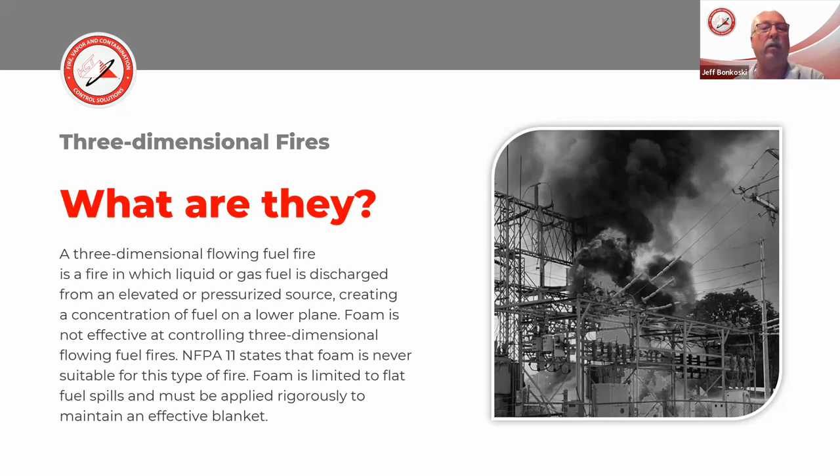If we look at the NFPA foam standard, which we used to use, it's been the only other thing other than water that the fire service, or even industry, has known. If we go into the NFPA standard, into Annex A11 of the appendix, we'll see that it states foam is not suitable for three-dimensional flowing fuel fires or gas fires. But what other options have we had up until now that we've been aware of?

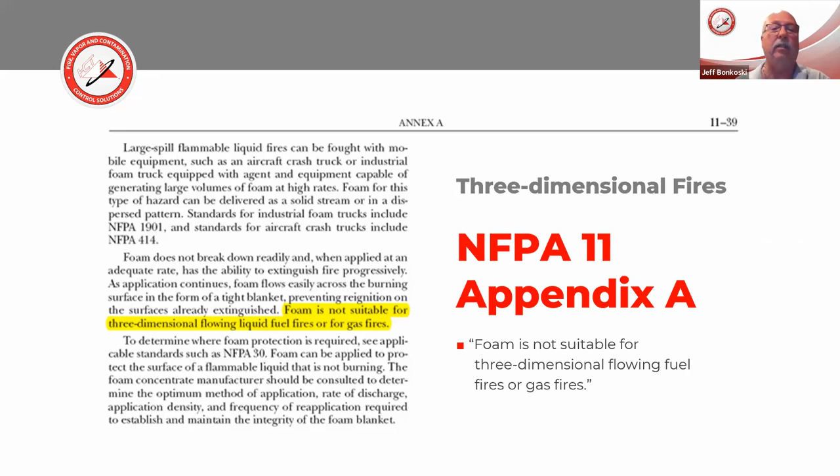Again, with the push for non-fluorinated products, here we are. I always point out to people, when we look at some of these tests on foam products and foams, we're testing them in ideal conditions indoors for use in outdoor and not-so-ideal conditions. So let's look at how this new technology, the F500 encapsulator agent, is able to have a great effect on these three-dimensional hazards.

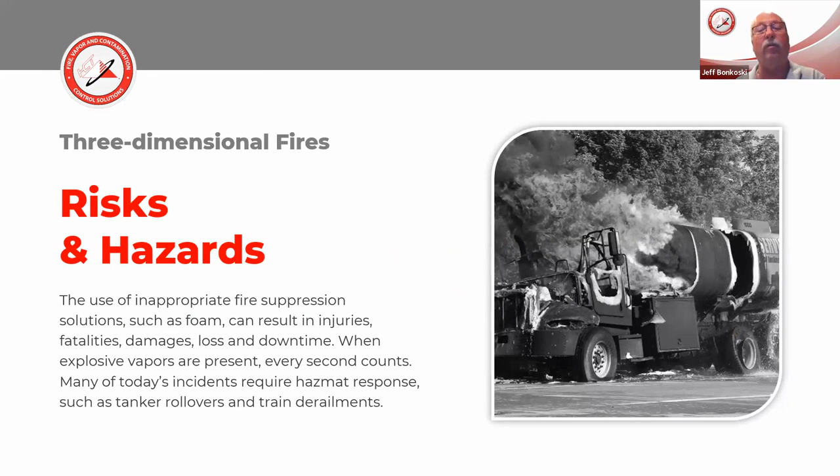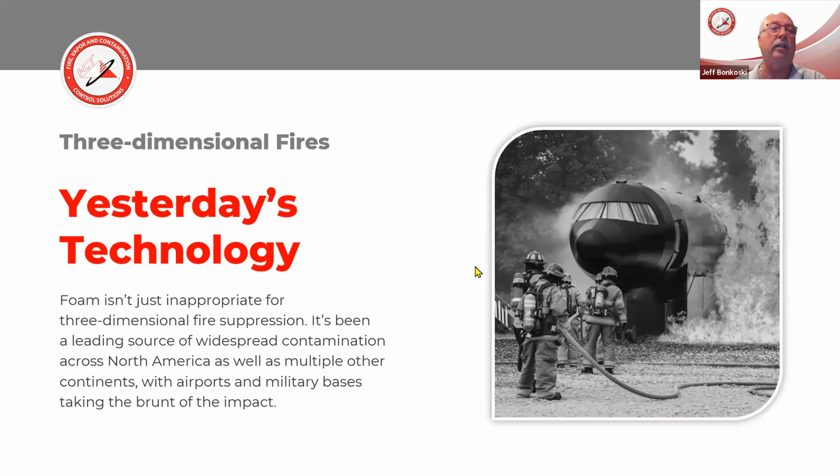And how, in the past, when we've used foam, it's been ineffective, and why. Let's look at yesterday's technology when we test it, and the problems it's causing with those forever chemicals around the world - especially with military bases, airports, and other training facilities where we have been teaching and working to utilize techniques for foam applications in fighting fires.

We look at a normal everyday car fire, we look at Class D metals, we look at some of the issues. Again, with these types of things, foam needs to be able to create a blanket in order to smother the fire.

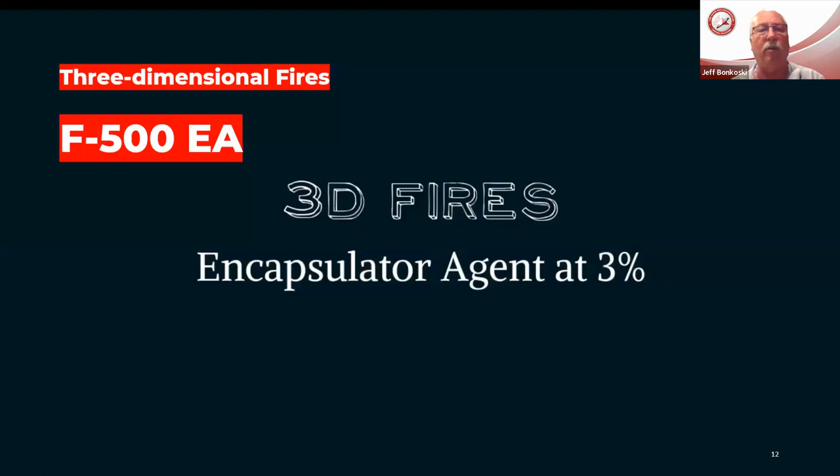We look now at the F500 encapsulator agent, and we have a real quick video showing some of the effects and abilities of the product for those three-dimensional fires. You see it's one hand line, 95 to 125 gallons per minute. Here we have like a well blow-off type system. One hand line, 125 gallons per minute. We're not using three or four hand lines plus powders. It's one hand line with the encapsulator agent being able to do the cooling and the extinguishing.

A mock-up of a jet engine cowling, again showing that three-dimensional, difficult fire that foam, and even powders, can sometimes be difficult to handle without the proper training. Here, in just a matter of seconds, with the encapsulator agent in the water stream, he's doing multiple things. He's encapsulating those vapors, he's cooling that steel. That steel is a source of reignition.

And here we have, again, like a valve or manifold, where maybe there's a bad seal or a bad valve and it catches on fire. Without the proper techniques with powders and foams, without enough of the product on hand, you're going to lose tank farms, you're going to lose facilities. Whereas with the encapsulator agents, again using a single hand line, it's very, very effective at being able to cool, control, and extinguish these fires rather quickly.

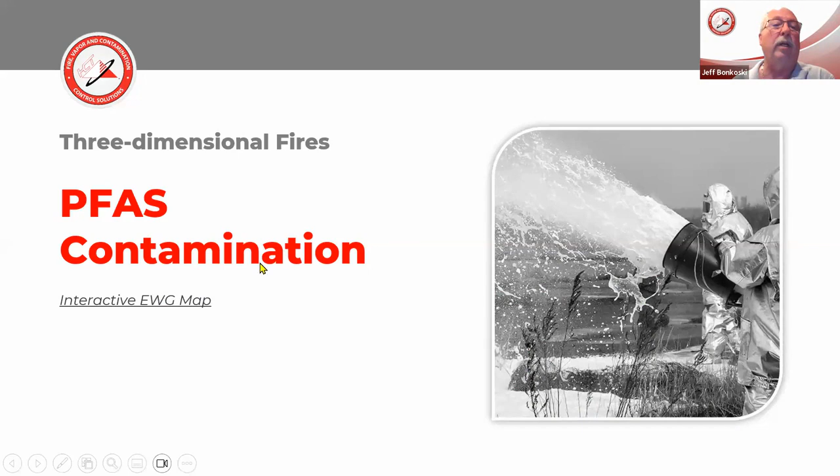So as we go on and look at more, let's look at a recent train incident that took place. Again, a three-dimensional fire. It's showing approximately 75,000 gallons of hazardous wastewater that now has to be treated after that train derailment in East Palestine, Ohio.

Again, the amount of water that's being used - as I continue on, we'll see how water is a very poor agent or method to cool.

When we look at the amount of heat that water could reduce, from testing done in some tunnel firefighting where they were trying to measure the reduction in heat with water, it was like 6 million kilocalories of heat being reduced when using water to try to extinguish these tunnel fires.

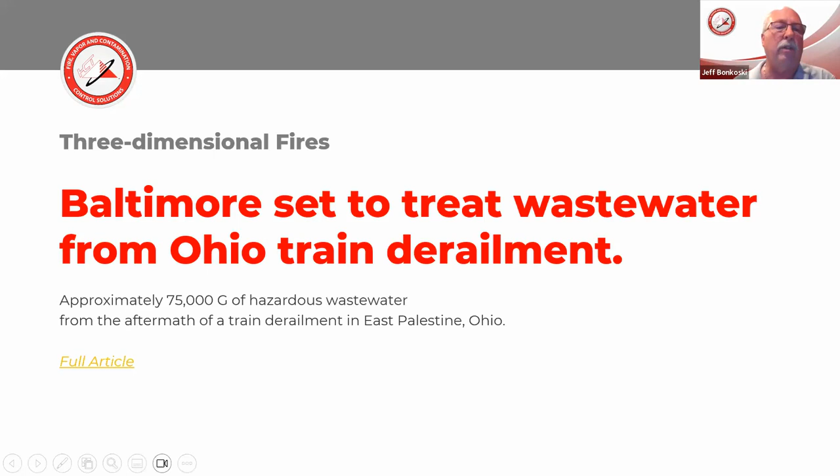And when they started adding F500 into the water solution, it was like 21 million - a huge increase in the amount of heat able to be absorbed. That even gets into when we start looking at trying to cool metal surfaces and all the other reignition sources we have to deal with.

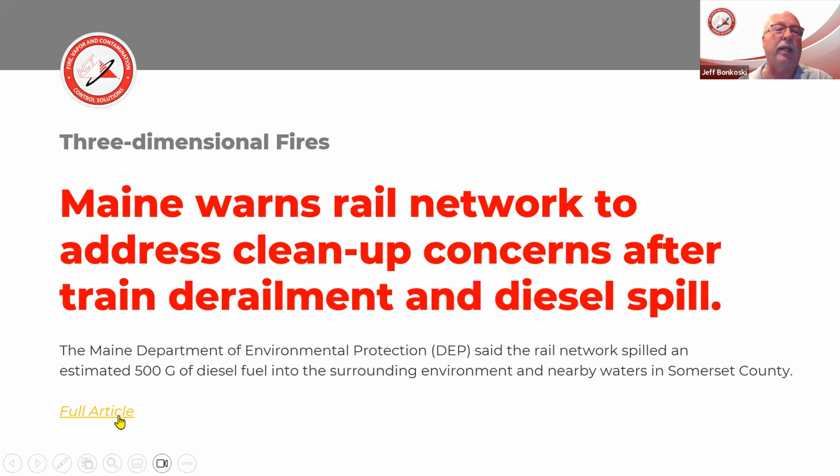When we look at, for instance, here in Maine, the network addressing the concerns after train derailments and diesel spills - we have an article that's going to be part of the presentation, attached here that you can read.

And while, yes, when we have these fires it's a three-dimensional fire and we start using water - let's look at how much was used in East Palestine. While they're treating 75,000 gallons, how much more was able to get away before they were able to start containing and controlling that water runoff? So while it was 75,000 gallons, I'm sure it was considerably more than that amount of water.

And in many cases, when you get out into some of these rural areas, water supplies are a little bit more difficult to get out to these facilities. It now becomes an issue. The thing is, we deal after the fire is out with how do we do the cleanup.

And when we start talking about the encapsulator agents, hopefully I'll be able to offer some insight into that as well.

It starts here with an incident that happened in Chile, where there was a train derailment. This train derailment dealt with a couple of things. It dealt with the diesel fuel that was leaking. Luckily there wasn't a diesel fire, but had there been, again we're talking that three-dimensional fire.

But in this particular incident there was also the leaking of sulfuric acid. So the department in Chile that responded to this incident, using encapsulator agent F500, started treating the diesel fuel spill, because it is listed as a surface and soil washing agent with the US EPA. They were utilizing it to mitigate and reduce the chances of a fire or explosion because of the heat that may have been yet within the engine, or a spark that might have occurred after the train derailment while they were trying to separate the cars.

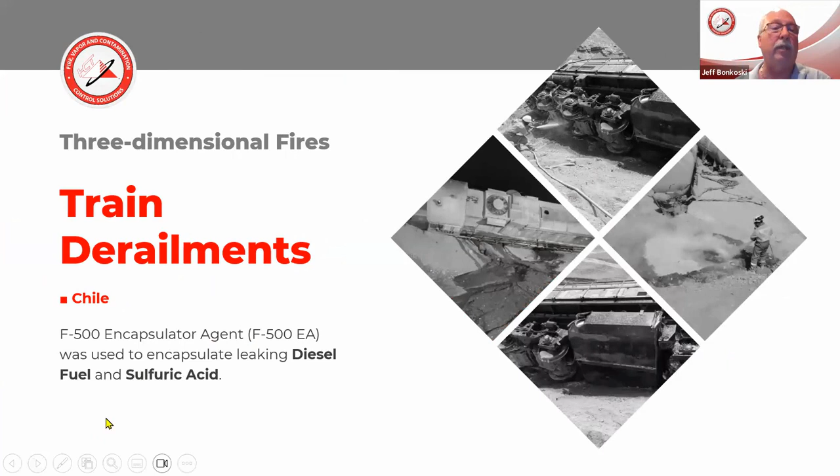But then there was also the issue of the sulfuric acid, the hazmat side of it. So the concerns were that they needed to be able to neutralize those acids as well. And we know when we try to neutralize an acid with a base, we have some type of a reaction. Well, when they started using the F500, they were able to neutralize that acid from a pH of 1 to a pH of 6 with no exothermic reaction, without having that cloud develop.

Which then led to another incident that involved trucks. A truck rear-ended a tanker that was carrying sulfuric acid, again causing a large spill. The spill was affecting the roadway as well as an area off onto the ground. The environmental contractor and the departments that arrived on scene started taking action, trying to neutralize this sulfuric acid - and downwind from this scene was a prison.

With COVID, the government didn't want to have to evacuate the prison, and having been aware of the testing done with F500 at the train derailment and the effects it had on the sulfuric acid, the hazmat side of that particular incident, they then utilized the F500 to neutralize the sulfuric acid.

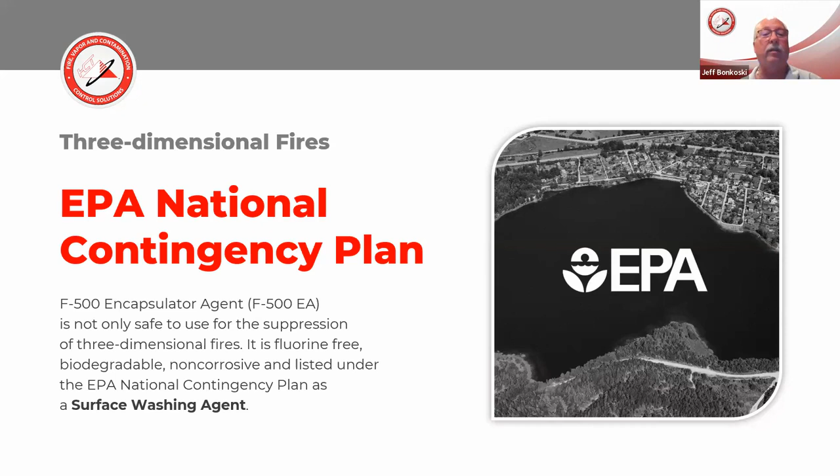The agent is fluorine free. It has been tested under the EPA 537.1 testing for 25 different fluorinated ingredients, and the results show zero detectable limits of fluorine in our products. So for people looking for that fluorine-free solution, here it is. F500 is biodegradable, non-corrosive, and as I said, listed as a surface washing agent.

So let's get into and hopefully give you a better understanding of what an encapsulator agent is. As I mentioned, it's fluorine-free, it's non-corrosive, it's biodegradable. It's a multi-class extinguishing agent, cULus, NFPA compliant, as far as fire and suppression. And what I always point out in this particular, is combustible and flammable vapor and spill mitigation agent.

And I always highlight that vapor because when I'm doing my trainings and presentations to firefighters and other organizations that are familiar with being able to extinguish fires, the question I often ask is: what do you as firefighters have to be able to control vapors and prevent a fire and explosion from occurring? And that question is asked because currently there aren't any that they're aware of.

If they're using the conventional extinguishing methods, the powders aren't going to control the vapors, the foams aren't going to control the vapors unless we're covering a pool and suppressing the vapors. But if it's a gas leak, it's going to really have no effect. But when we start looking at the encapsulator agent, we'll see how these agents are able to have an effect on the gases.

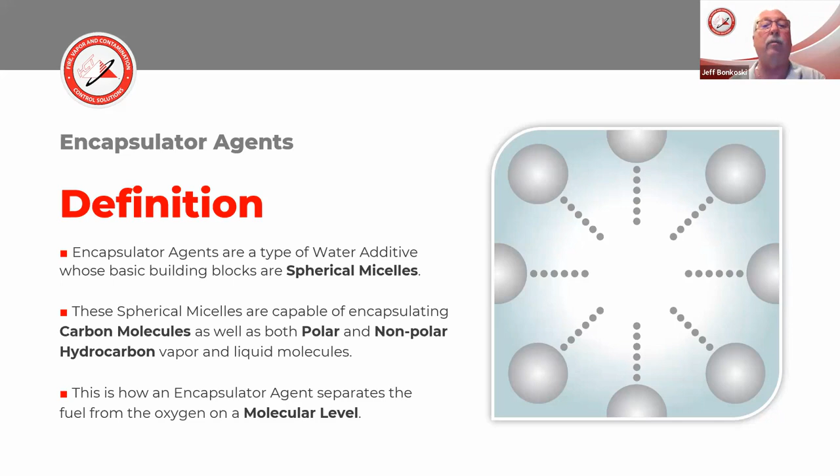When we start talking about encapsulator agent, we're talking about changing the chemical makeup of a water droplet, these spherical micelles. So we're working on a chemical molecular basis. And we'll see here with this video, which gives us a better understanding of how those spherical micelles are formed.

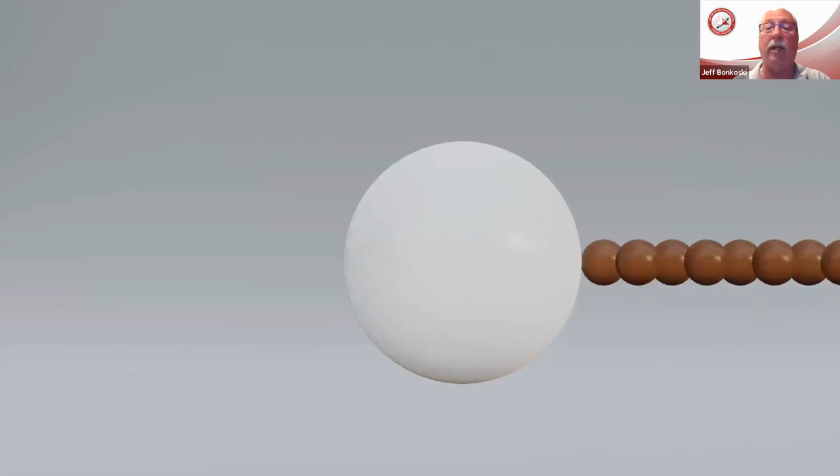So here is just a real quick animation showing again the basic building block. And it starts with our molecule, and our molecule has a polar head, which loves water, wants everything to do to be in water. And then that non-polar tail, which fears water, wants nothing to do to be in water.

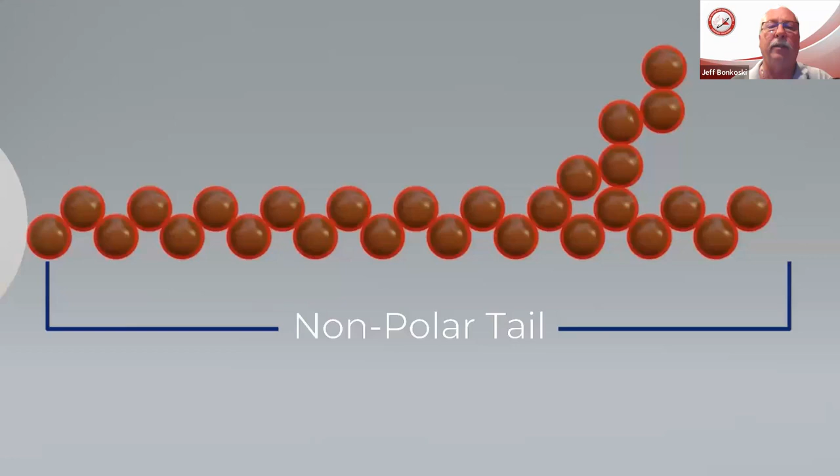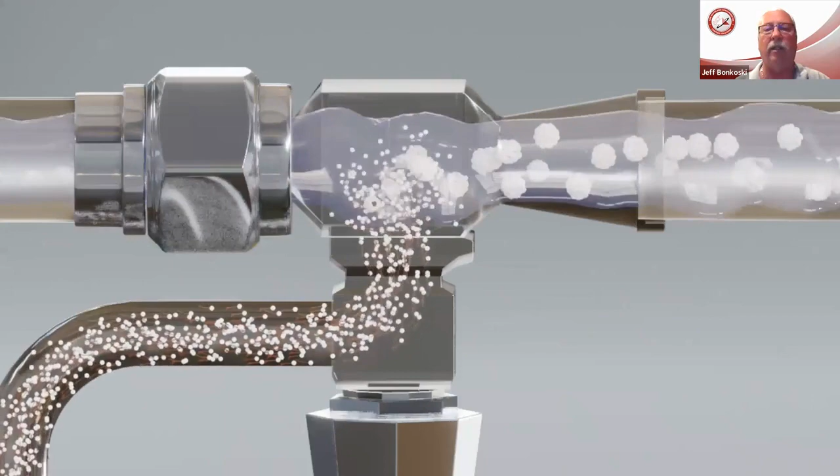So when we sit there and start to add it into the water stream, and it can be pre-mixed, it can be educted, injected, however we get this into the water, batch mixing, as soon as it gets into the water, those tails want to get out of the water, so it instantaneously orients into these spherical micelles.

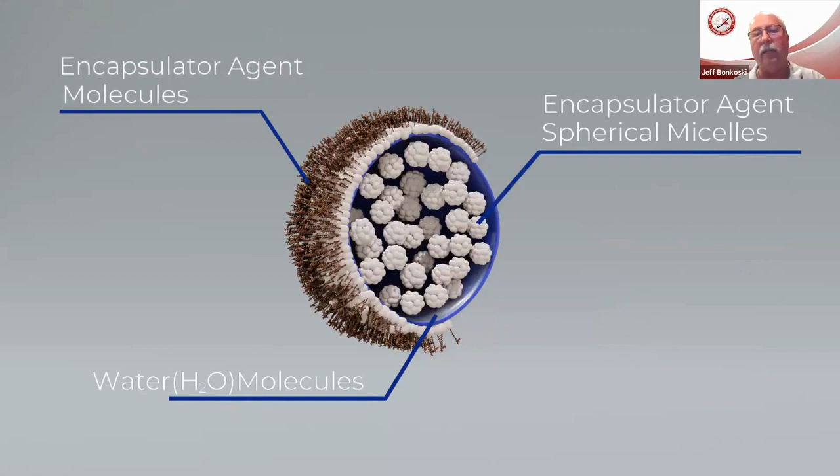So now as these spherical micelles flow through the water and they come out of the nozzle or the sprinkler head, those spherical micelles closest to the surface, because it takes less energy for those tails to get out of the water than to stay in that micelle formation, they break apart, those tails spin out, and we now put a skin on the surface of each and every water droplet.

And when we do that, we change the characteristics of how it's able to extinguish, how it's able to encapsulate those gases as well as the liquids.

And when we look at the animation here, this final picture, we see that there's still micelles inside of each and every droplet. And just to give you a little bit of a visual, if that water droplet was the size of the Earth, those spherical micelles inside the water droplet would be about the size of a pea. So it just gives you a little bit of a visual as far as how many millions of micelles are yet inside of each and every water droplet, and what they do and how they work and how they're able to have an effect.

So let's look at now how the encapsulation side works. Being able to, once we've encapsulated a flammable liquid, we're going to reduce that risk of ignition or reignition and offer that burn back resistance.

Mentioning how some of the other agents currently and in the past being used, the foams, work on that mechanical basis - they cause separation between the fuel and the oxygen. The problem is that when that blanket breaks down, if we're not there to reapply and we still have that heat source present, once that blanket breaks down and exposes the fuel, we have a reignition. Or we have to be careful that if we walk through or anything disturbs that blanket and exposes the fuel, again, we have that chance for a reignition.

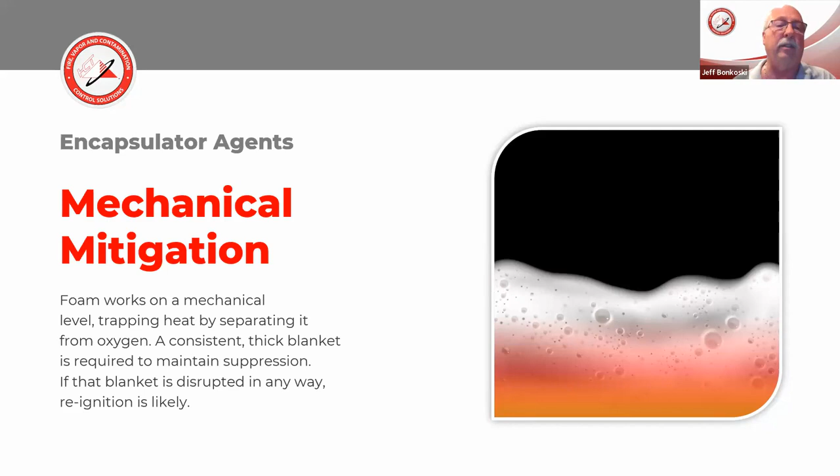So working on that mechanical basis, now let's talk about micelle formation and the difference with an encapsulator agent working on a chemical basis. What we're doing is encapsulating, trapping those fuels inside water droplets. Each and every one of those micelles acts almost like a little Pac-Man, and they hold those petroleum products, carbons, hydrocarbons, polar solvents, gases, vapors - the hazardous gases we hear about - reducing the toxicity and the soot and smoke. It's all held within that droplet size.

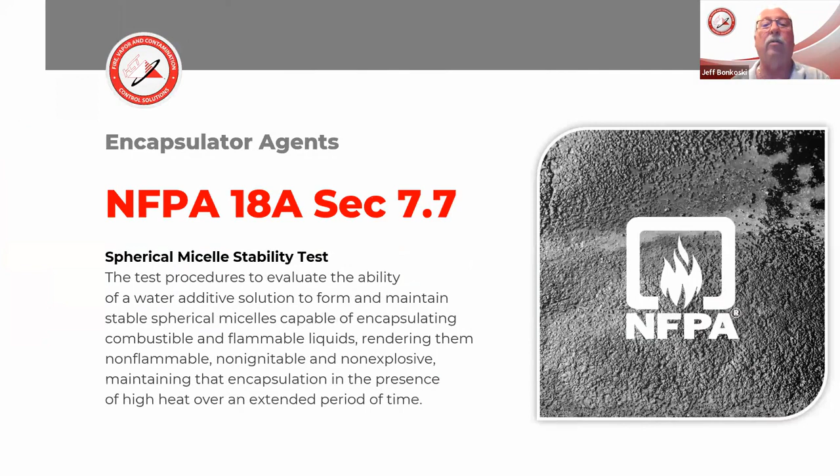When we look at the spherical micelle stability test, covered in NFPA 18A section 7.7, it talks about how the test is run and how it's able to encapsulate those flammable and combustible liquids, rendering them non-flammable, not ignitable, non-explosive. This isn't something that just occurs for a matter of hours - once that fuel has been encapsulated, it will not burn until it has evaporated away.

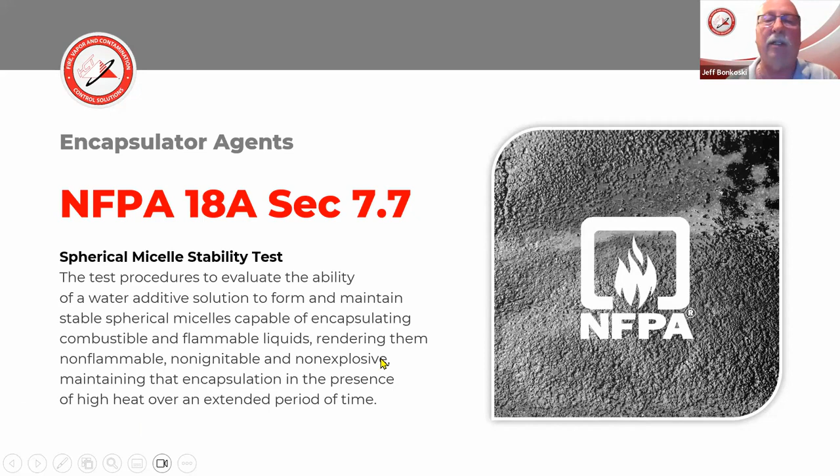And like I say, in doing some testing in pans and in other ways, I can say that when I put encapsulated gas in a pan until it's evaporated, in a week or two, I have not been able to reignite that gasoline.

So the question I ask here - and I hope, please, when we get towards the end of the presentation, take notes, or if you want, put your questions in the chat or be ready to share - how is your team currently approaching three-dimensional fire hazards? What experience have you had with those types of fires? How have you dealt with them in the past, and what difficulties have you had? How can we address and help you mitigate these in the future?

The next thing I want to talk about as we continue on is heat reduction, because I've talked about the encapsulation abilities of the F500. And one of the other things I mentioned was that metal, that reignition source.

In the video you saw from Vietnam with that tanker truck, I mentioned that when they were spraying with those water droplets, the absorption of heat from spraying that metal reduced those temperatures, dropping them below the auto-ignition temperature and eliminating the reignition source for the gas still flowing down the sides of the tank. So here we're going to talk a little about that heat reduction, and again how the encapsulator agents, by changing the chemical makeup of water droplets, work.

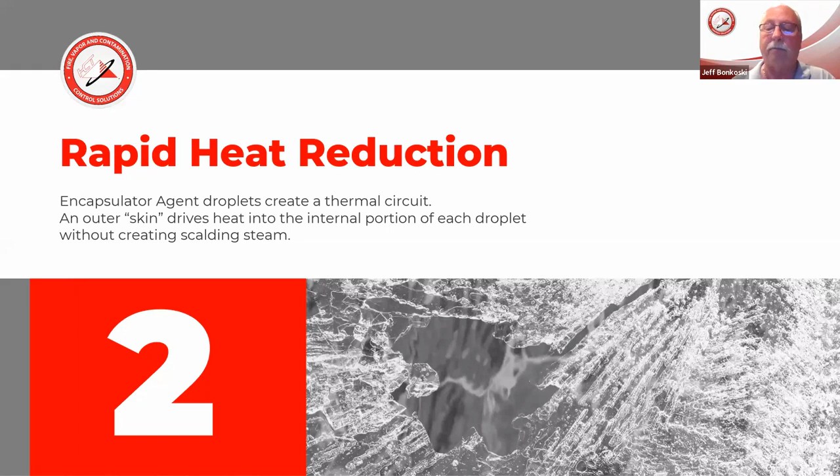When we look at water for fighting fires, we're using it to create steam. We're converting water to steam to try to put fires out. In many cases we're using very, very little of a water droplet to extinguish a fire. When we're using water on a structure fire, we're often using maybe 3 to 5% of a water droplet to actually extinguish it.

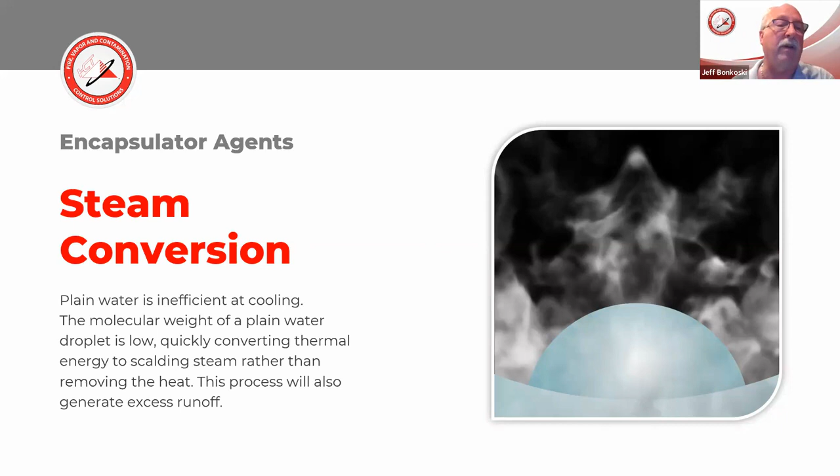When we look at that steam, those scalding temperatures and so on, it's one of the hazards of firefighting. That's why we're putting so much gear on now to protect ourselves from the heat, from the steam, and from all the toxins and carcinogens being released in these fires. And yes, a structure fire is a three-dimensional fire, so it falls into that category.

We talk about the ability of the encapsulator agent to change the mechanism of cooling and extinguishing. Instead of steam, we use thermal conveyance. Remember the animation where we put those tails sticking out on the surface of the water drops, that skin on the surface. Those tails act like a heat sink and drive the heat inside of each water droplet.

I mentioned those millions of spherical micelles inside the water droplet. They rapidly absorb that heat, but then slowly release it into the water around them. In that process, the water never reaches 212 degrees.

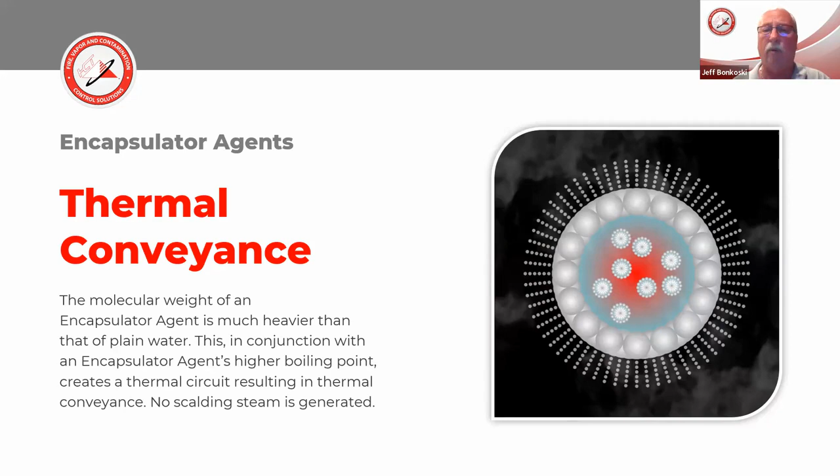It never creates steam. You'll watch videos where F500 has been used to extinguish fires and you'll see a lot of heavy white mist coming off. It may appear to be steam, but if you take your glove off, or put a bare hand into that mist, it's been described as no hotter than a shower. So it will not be scalding steam, even though it may appear to be in videos.

Let's talk about the interruption of the free radical. When we look at that black smoke, there are fuels basically still present—they just haven't burned completely—as well as the carcinogens and toxins being released when we have these three-dimensional fires.

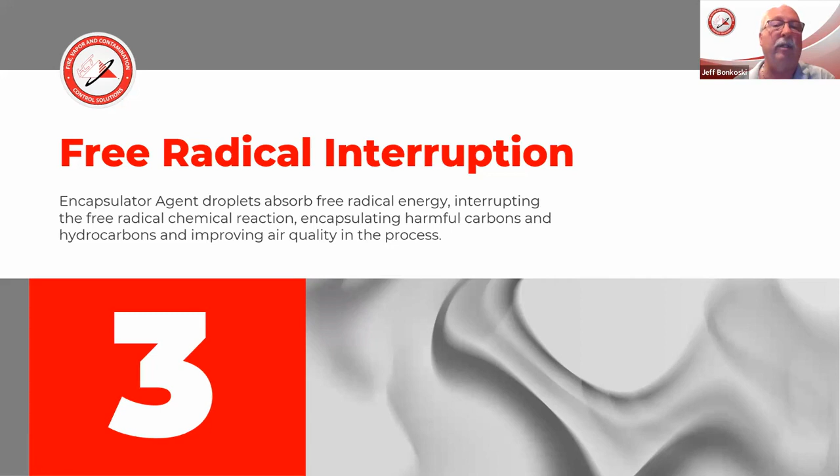When we look at this chain reaction, we see the ability of the encapsulator agent to have an effect on encapsulating those gases being released, and how it affects things like lithium-ion batteries and the HF gas, greatly reducing the amount of HF gas. When you watch videos on our website, and I encourage you to visit our website and look at our videos, you will see in many cases the black smoke rapidly and quickly turn to white smoke.

And the reason is because we're able to have an effect on those carcinogens and those toxins where they form. Here's a good example. On this particular fire, we have tires burning, black smoke at first, and you'll see just how quickly that black smoke turned white. I'll back it up so you can see there's still a lot of fire, but the black smoke is gone. Now we get into that white mist I talked about. It is not steam, it's a warm white mist. We get into our overhaul, making sure the fire's out, and we're able to continue on.

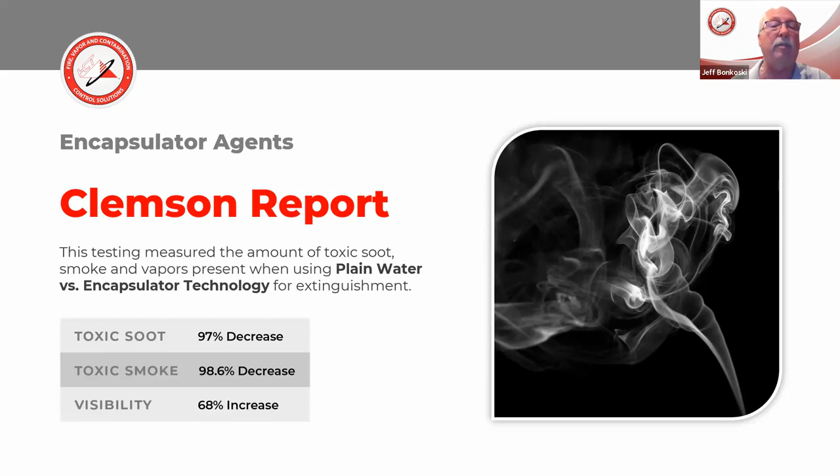So it's a big thing when you start looking at structure fires. Another question: what is your team doing currently to reduce your exposure to toxic gases and carcinogens? It's a huge issue in the fire service. These fires we're being exposed to, three-dimensional fires, structure fires, truck fires, and all industry, they're all giving off and emitting these toxic gases. And they're having an effect not only on firefighters, but possibly on our communities when those smoke plumes go downwind. So I ask, what are you doing to reduce your exposure or your community's exposure?

So we start looking at some testing done recently, looking at minimizing the use of water, and how much we can reduce the smoke and the number of hours firefighters are on scene at many of these fires. This is testing done by the Laval Fire Department in Quebec, who were kind enough to share their results with us. This started because they had lost a brother in the fire service to cancer, and they wanted to find a solution to help prevent others and make firefighting a safer profession.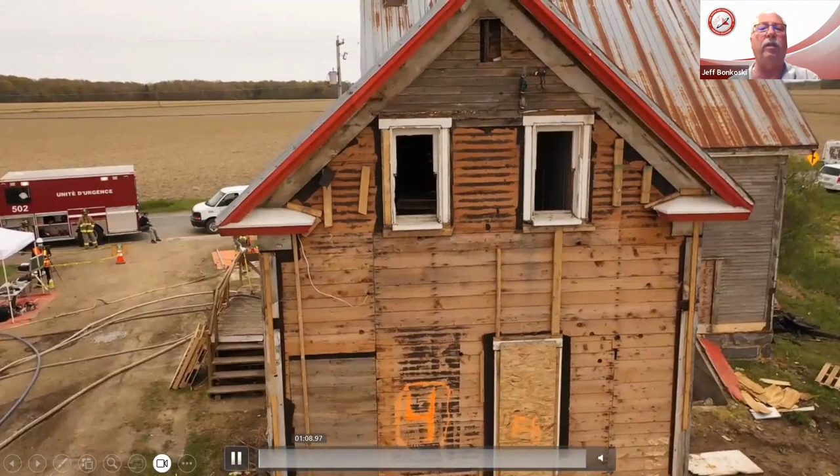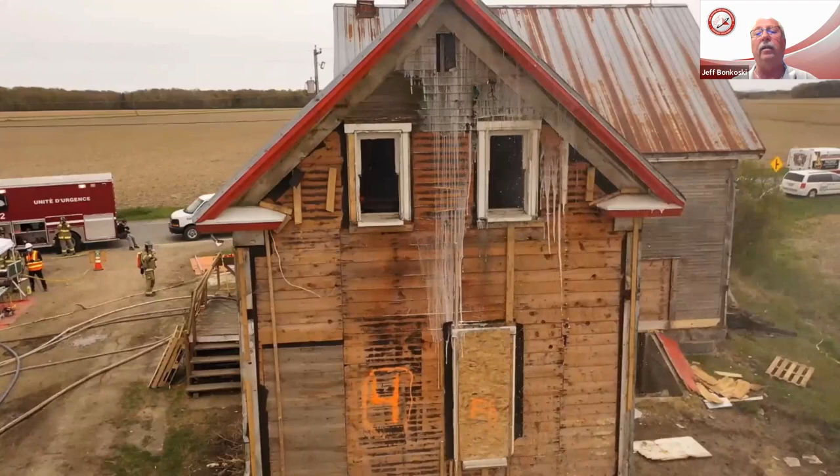These are some pictures that came to us from Laval, drone footage shot during their testing. They broke up this particular house and did a series of 4 fires - 2 using plain water, and 2 using the F500 solution. After each evolution, they started with a fresh, clean hood. When done, they would take the hoods off, put them in bags, seal the bags, and give them to a representative from the University of Ottawa to maintain chain of custody. Then those hoods were sent off to be tested. Let's speed this up a bit as we get the fire burning and get that smoke.

One of the things I like about this particular video is, again, when I do my trainings with departments and talk to people about dealing with these fires, is the transitional attack. There's no reason why we need firefighters on the roof of a structure anymore. We're putting firefighters on the roof for a couple of things. One, they cut holes in the roof for ventilation to get that black smoke and heat out so that search and rescue can more easily find the victims.

But when we talk about the abilities of the encapsulator agent, and that Clemson report, to improve visibility and reduce the heat that firefighters are feeling, we're able to use this transitional attack to actually start extinguishing the fire and cool those temperatures. You can see here how quickly that smoke disappears as they make that interior attack. That white mist coming out shows the improved visibility inside the structure.

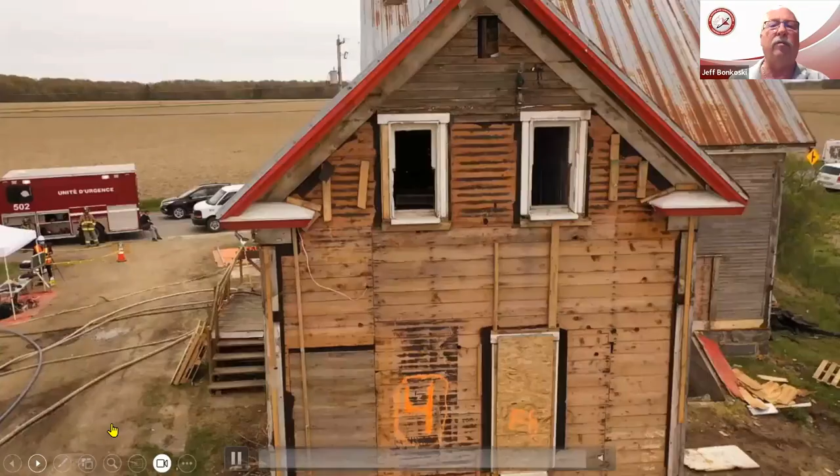The same thing's going to happen if you're a firefighter responding to a structure fire with reports of victims inside. You use the transitional attack, you're improving your visibility, reducing your heat, and making conditions much better for everybody that's involved.

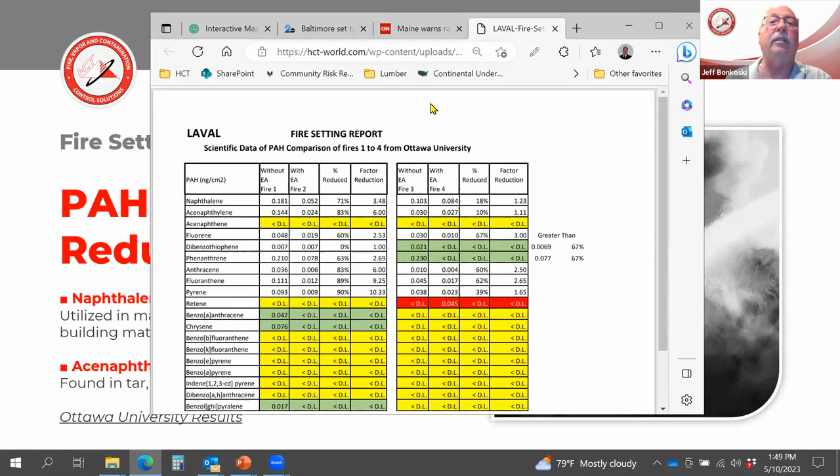So when we start looking at the chemicals and the reduction, this is a report that comes to us from Laval, from testing done at the University of Ottawa. It's a graph showing the abilities of the encapsulator agents to... excuse me, sorry about that, hit the wrong button. I want to enlarge this a little bit, but we'll see here when they started extinguishing with plain water, and then with F500, how much of a reduction there was.

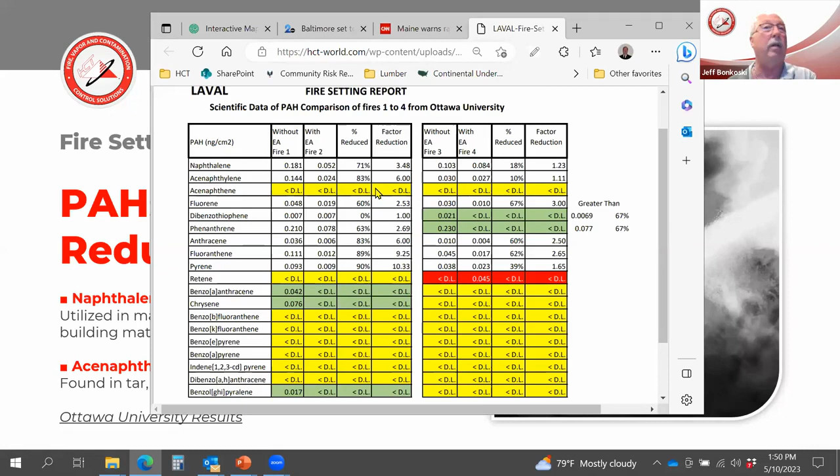Here we're looking at naphthalene, 71% reduction, 83% reduction on the... acenaphthylene. But all of these different chemicals show a great reduction in our exposure as firefighters. And it's not just structure fires - we start getting into the industrial side with fires like train derailments, sulfuric acid, where I talked about being able to reduce pH from a 1 to a 6, without the exothermic reaction, without the cloud forming, again reducing our exposure to these toxins. So there are many ways we can reduce our exposure when dealing with these types of fires.

So when we look at the conclusion from this report, which should be linked with this presentation, the main part is that Laval is looking for an agent that would hopefully reduce firefighters' exposure to carcinogens and toxins. Moving forward, the 30 firefighters involved with this all agreed that the Laval Fire Department should move on and utilize F500 on all fires.

When we look at it, the big push right now is trying to find products that are eco-friendly, fluorine-free, biodegradable, and don't create PFOS and PFOAs, as we saw from the interactive maps, due to the effect that's having on groundwater in so many areas. We can go back and look at reports from around air bases where cattle farms or dairy farms have to destroy milk because cows drank contaminated water, and areas in other states where there's a radius around an air base warning not to eat the deer or fish. So fluorinated ingredients are a huge issue we're trying to eliminate.

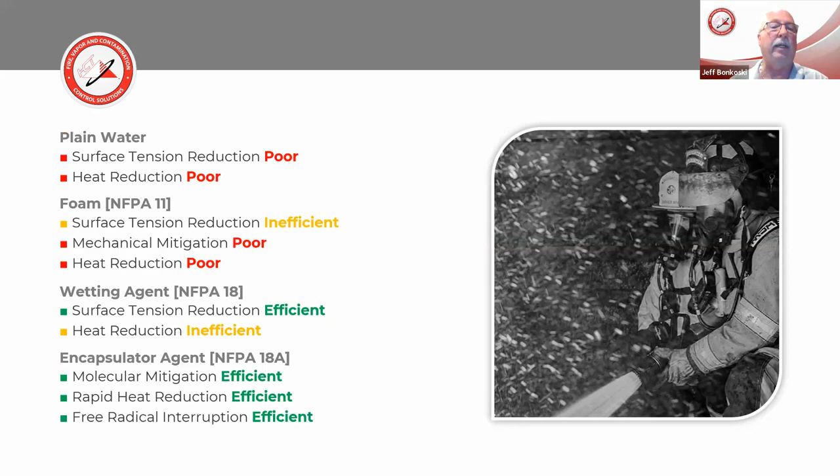Wetting agents are somewhat better, but when we get into the encapsulator agents, when we look at NFPA 18A, we again start talking about that spherical micelle, how it's able to work on that molecular basis, how we get that rapid heat reduction and that interruption of basically the carcinogens, the soot, and the toxins.

So what we want to get into now is planning—how do we do it safely—the multi-hazard classes, talking here about lithium ion batteries.

When we talk about three-dimensional fires, while many may just look at it from the standpoint of it being a petroleum fire, that's not the case. Let's look at all the different areas we can deal with—as I mentioned, a structure fire is a three-dimensional fire, as is a recycling fire at a facility. It's not just a petroleum fire that's three-dimensional.

If it's got any height to it, any motion to it, any spraying to it, it is a three-dimensional fire. And here again, what's coming our way and growing rapidly is lithium ion batteries. In many cases, you look at those videos and see those jetting flames shooting out when these batteries burn, you see the batteries popping and flying off into the air. We're dealing again with that three-dimensional hazard when we're talking about these lithium ion batteries.

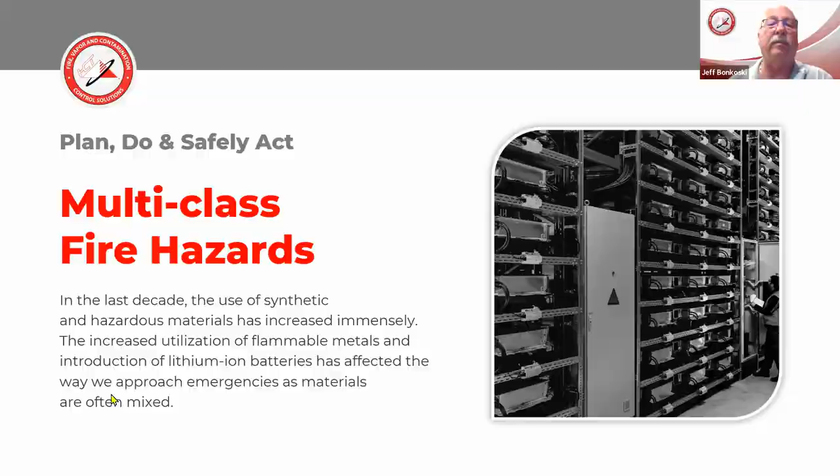I know for those who've been in the fire service for a while, back in the day, early on, you could get off the truck with a water fire extinguisher, go in, and in many cases have an effect on some of these fires.

But today, with synthetic materials, fabrics, and composite materials in our furniture, these fires are growing so fast that when firefighters arrive, we're going into structures that are more involved, rooms getting ready to flash or that have already recently flashed. We're getting into temperatures much hotter than we used to.

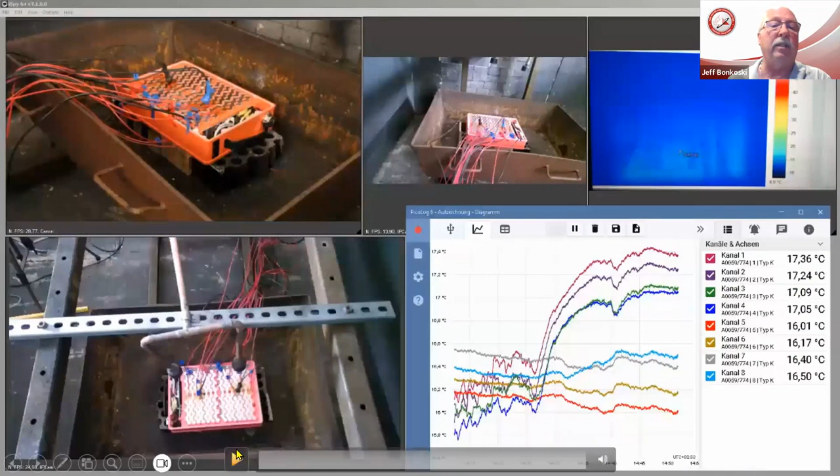We look at some testing that's been done with lithium ion batteries. This comes from testing that was done. This is one I like to show because it has multiple visuals.

We have thermal imaging taking place, we get to see the batteries, a lot of wires coming off, and you'll see at the bottom some thermocouples, some thermal sensors. In the top left picture, we start to see smoke develop on this battery—it's being overcharged so we can get into thermal runaway on a cell.

Once that thermal runaway starts, it leads to thermal propagation, where the cells or batteries around the one that initiated the fire continue to ignite and grow. We'll watch the temperatures build up as it continues through its thermal runaway.

The main thing we'll see, once we activate the suppression system, is just how quickly those temperatures drop. We're looking at temperatures over 600 degrees C dropping down to 100 or so degrees in just a matter of seconds.

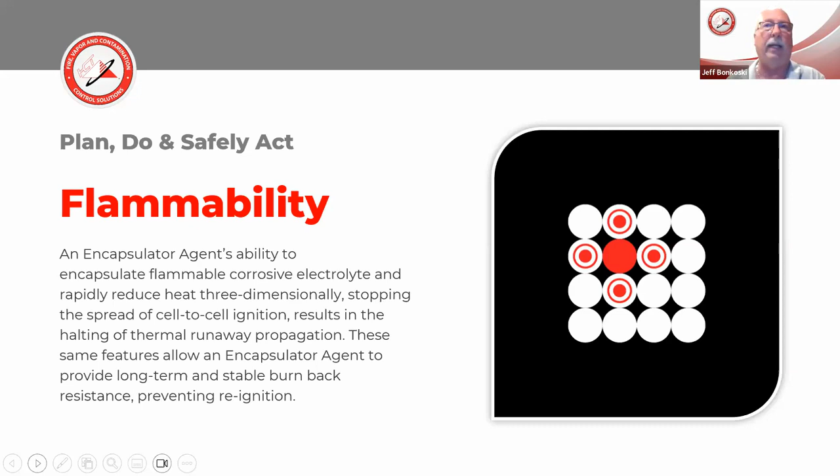We saw that ability of the encapsulator agent to encapsulate that gasoline. So we do the same with those electrolytes. We encapsulate, we reduce the toxicity and the corrosiveness of the electrolyte. We reduce the toxicity of that water runoff. We encapsulate, again, eliminating that fire hazard, that reignition hazard. And like I say, once it's been done, it's no longer going to be ignitable as far as being able to torch it. Now, that being said, if in the process of moving the battery, you damage another cell or you cause some more damage, you could have another incident that occurs. But as far as a reignition, there hasn't been any that we're aware of.

We look at, again, the gases that are being released when we hear and we talk to people with regards to lithium-ion batteries. They talk about the hydrogen gas or the methane, the acetylenes, and all the other things that might be coming off the batteries when they're burning and the gases that are being emitted. Testing shows that F500 can encapsulate that hydrogen gas, encapsulate that methane and the acetylene. Those flammable gases, again, as I said earlier on, when I talk to firefighters and I talk to people about what do you currently have in your toolbox that works on flammable vapors, and you kind of get those blank stares. Well, here you now have a solution that you can have and be able to spray towards flammable vapors and encapsulate them and reduce those explosive atmospheres and reduce those explosion hazards.

That toxicity, reducing that HF gas, and testing has shown that it greatly reduces in many cases down below, or it gives us about a 30-minute IDLH from testing that was done with some battery cells that Johnson Controls had done and shared the reporting with us. Batteries that were putting off 2,656 parts per million of HF gas, and when F500 solution was used, the highest readings they got were 37. So it was about, you're about a 30-minute IDLH as far as your exposure limits. So it gives you a little bit of a safety margin as far as exposures.

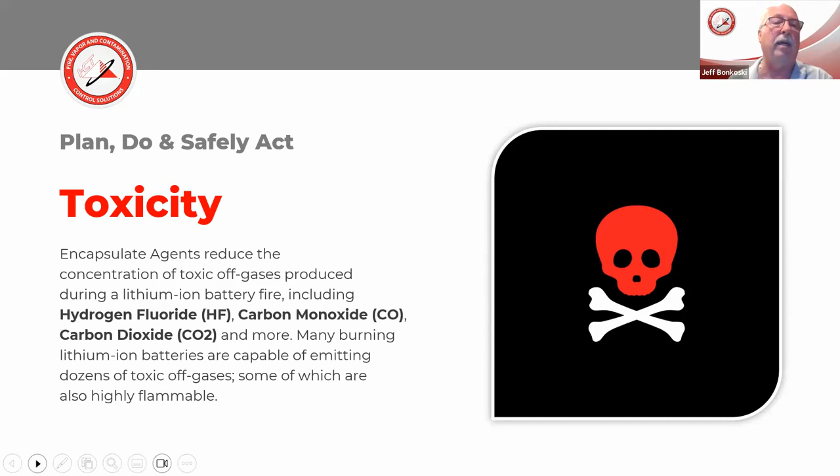Not that you want to be in there, but again, the reduction in those gases, the exposure that you're getting to those gases can be greatly reduced when you start looking at the ability of using these agents, F500, in fighting your fires in today's fires.

So other than water, does your team have an effective solution for lithium-ion battery fires? We look at the reports on powders and other agents, and we understand they don't work. The solution is water, and it's copious amounts. But even with water, how many times do we hear about reignitions? When we start adding encapsulator agent F500 into our water stream, we can have a great effect, requiring much less water to extinguish these types of fires.

So let's get into our delivery methods. How and what equipment do we need to get the F500 into the water stream? As mentioned, the F500 can be batch mixed or introduced through eductors. We have the 2.5 gallon water extinguishers, the Kwamus quick attack mobile units in various sizes at 25, 50, 75, and 100 liters, and our TKO nozzle, very effective for some of our smaller fires.

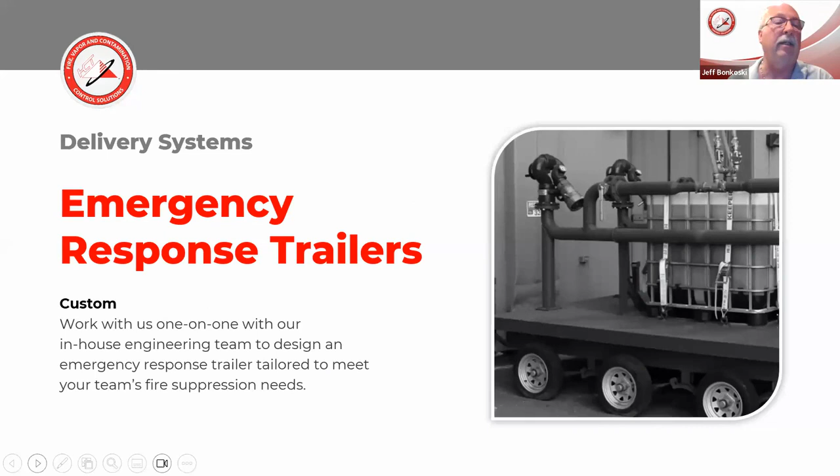We also look at the emergency response trailers. We're working with many departments and communities looking for trailers they can use to meet their needs, supplying F500 for larger incidents, especially for industrial, recycling, and other applications where better systems are needed. Those trailers can be configured in various ways to meet your needs. Here's one set up with an actual tank that holds 500 gallons. This has been utilized on many occasions in the Kansas area, and it's a very effective unit for extinguishing these fires.

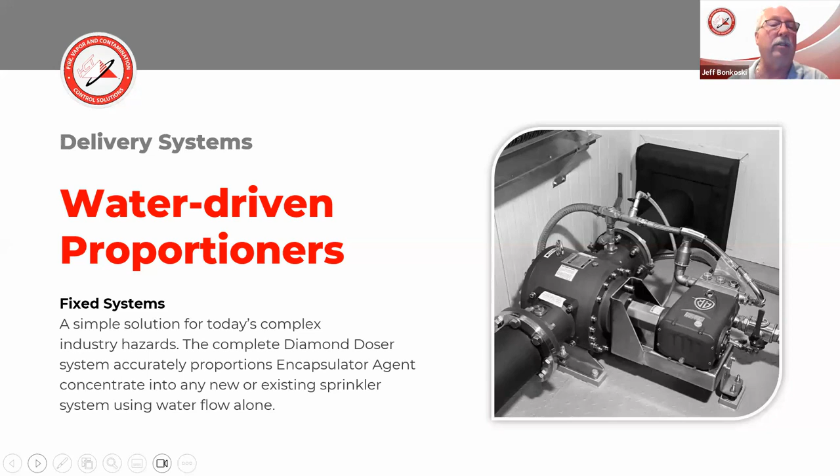For industrial applications, we look at fixed systems, fire protection systems inside buildings, or master streams pre-piped to provide solution for tank farms and other applications. We have our diamond doser, which can be installed into existing fire protection and sprinkler systems. Then you have water driven proportioners that are mobile and can be accessed on trucks. One nice thing about these is they work through a wide range of flow rates, for instance from 230 gallons up to 1500-1800 gallons per minute of solution, giving you a more accurate percentage for fighting these types of fires.

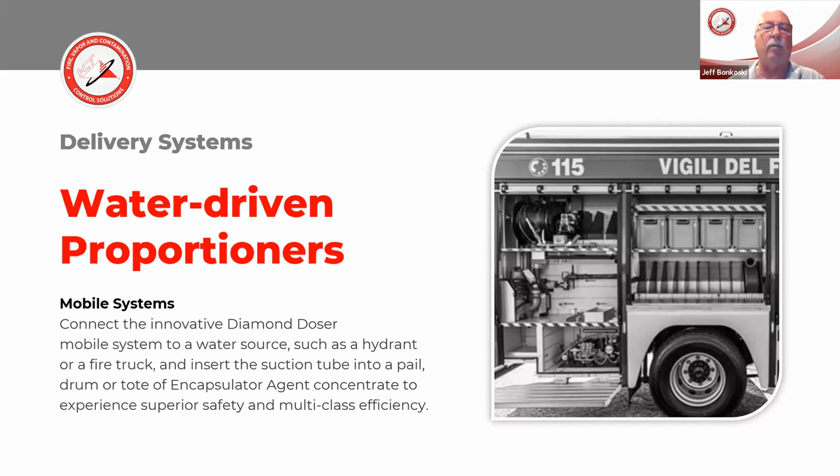With inline eductors, you're needing around 200 psi, and you have to match the eductor to the nozzle. There are things to take into account - if the eductor isn't right at the source, you have to overcome friction loss and similar issues. So they can be a little finicky and complicated, and in many cases when I've seen them in action, they have a tendency to fail. The water driven proportioner is much more user friendly and a much better way to go.

With that, that will conclude our presentation. I want to again thank everybody. Hopefully this was informative and gave you information on the differences and how encapsulator agents are able to deal with the three-dimensional aspects of fire, versus the conventional methods we're currently using - foams and powders - only being able to work on the two-dimensional aspects of the fire.